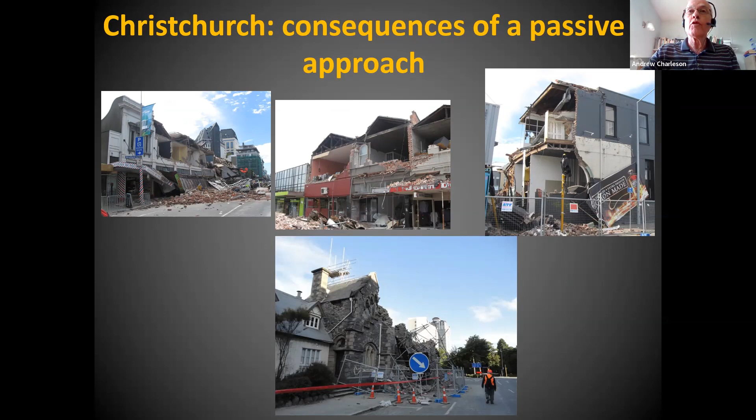Most of the masonry buildings experienced partial collapse, so unfortunately Christchurch has lost a lot of its historic buildings. Here is an example of an old 3-story masonry building in Christchurch, and you can see that most of the damage to this building has occurred by the walls and the gables failing in what we call face load.

If I can just explain using this, imagine this little pad is a wall, then the face loads are acting at right angles to the length of the wall. So these are the inertia forces we call face loads. And where walls are not tied into the floors or the roof diaphragms, where the tie along these lines is poor, then in the earthquake shaking, the masonry is incredibly vulnerable to falling out of plane.

So this is a good example, and there would be hundreds of masonry buildings where especially the upper walls just collapsed and fell onto the street. The lower walls are less vulnerable because they experience the compression of the masonry above them, and that compression gives a considerable degree of extra strength to these walls against out of plane loads.

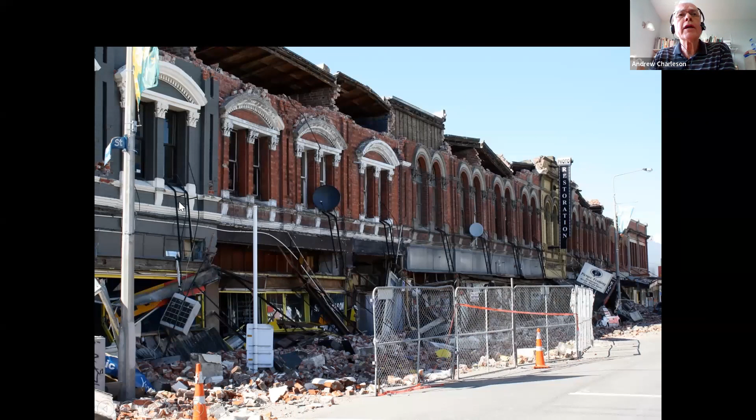Here you can see a street of old masonry buildings, and look, almost every one of the top floors of these buildings has lost its external wall. That was the pattern right throughout the city. So I think we could say the most extensive failure was for out of plane forces causing collapse of walls, but there was other damage as well.

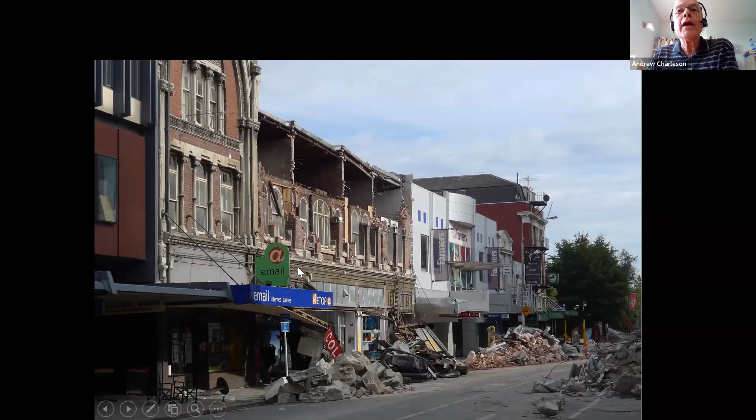Here's another street, and wherever the walls were not tied well to the floors and the roofs, there we experienced this face load collapse. The rest of the building, in this case, is relatively undamaged.

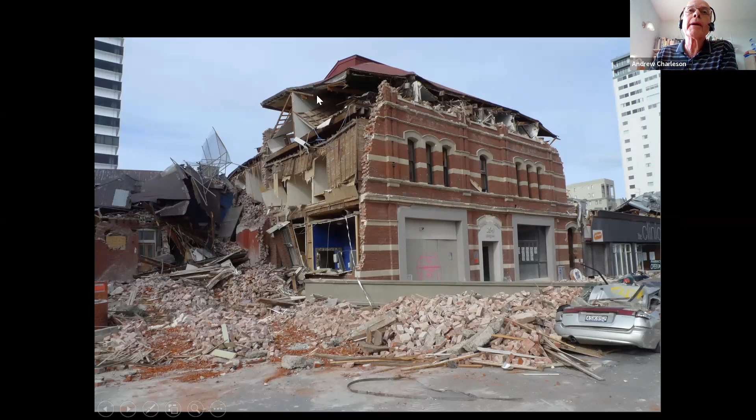Here is quite a severe case of the upper walls being lost. There might have been some load-bearing timber framing within the building, and so that's prevented total collapse. But you can see how the thick facade has fallen away from the main structure, and it's left this failure line going right down to the foundation here.

You can also see that the loss of the facade wall, excuse me, I'll just annotate with my mouse. You can see that the loss of the facade wall hasn't affected the load bearing of the floors. And that's because the floor structure is spanning parallel to the facade. So at least the building didn't totally collapse because of the direction of the floor spanning inside the building.

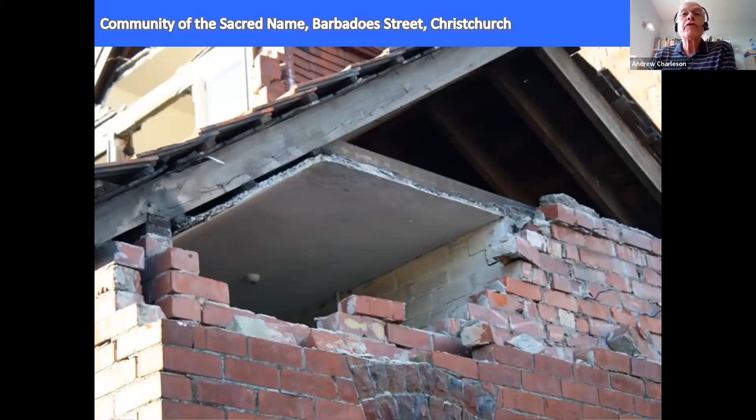As I mentioned, it was very common for gables to collapse. Here is a close-up example where most of the bricks of this gable have fallen. What we can observe is that there was no strong connection between the masonry and the timber roof framing, so effectively these bricks were just cantilevering under face loads.

We can tell that the masonry is not in good condition at all. Some of these bricks are really loose, and you can see that some mortar has been lost. The mortar wasn't very good quality, and so under even small face loads, gable walls such as these can almost be expected to fail.

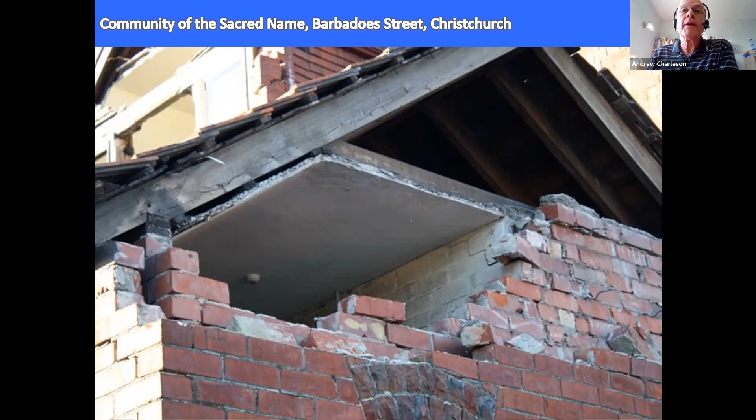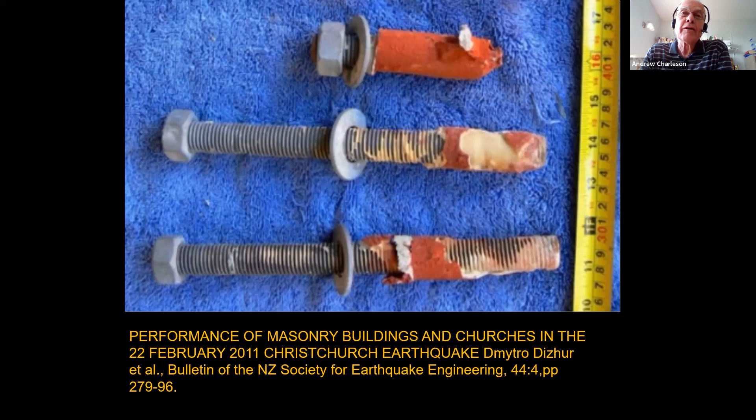These bolts had been installed as part of a retrofitting program, maybe a few years before the earthquake. This is just a reminder that when we retrofit, we've got to make sure the quality of construction is very high. Otherwise the earthquake will discover these points of weakness, and we will end up with performance perhaps almost as bad as if we had not retrofitted that building.

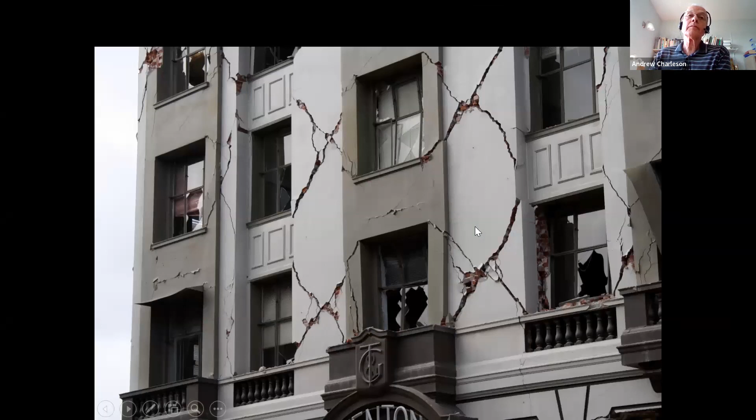Most of my slides so far have shown examples of face load collapse, but there were also many examples of buildings failing in shear. This is in-plane failure, and these diagonal cracks in the piers of this building speak very clearly of in-plane shear failure. This building at each level has suffered very badly from the overall inertia forces being resisted by this front facade, and the level of those forces was high enough to cause shear failure in the masonry within these columns or piers.

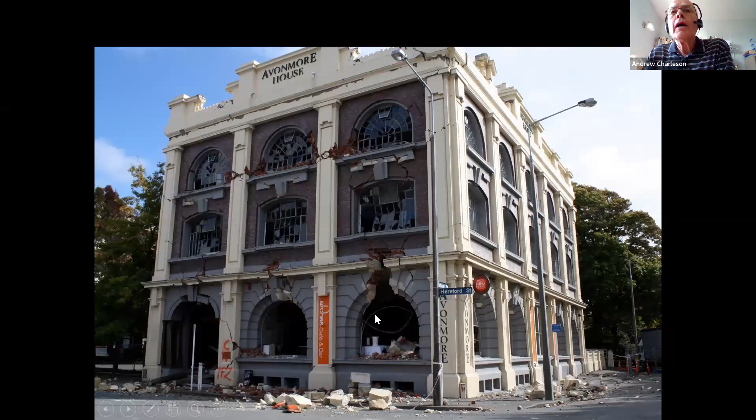Here is another building with large openings at each level. In this case, although we got a little cracking in the piers, not a lot, we mainly got failure in the spandrel beams, which are masonry. Due to the distortion of the building we get high shear forces in the spandrels, and where they are weakest, in this case at mid-span, failure occurs at every spandrel. This pattern continued up the building too, with the highest spandrel panels also totally failing. At the top of the building, it looks as if we got a bending failure at the base of these upper piers. So we get shear failure in the spandrels and some bending failure of the piers.

This type of damage was relatively common where we had buildings with many openings—you might say where the designers had basically created a frame building using unreinforced masonry. We know now that this doesn't work. Masonry is far too weak a material to be used as a moment frame.

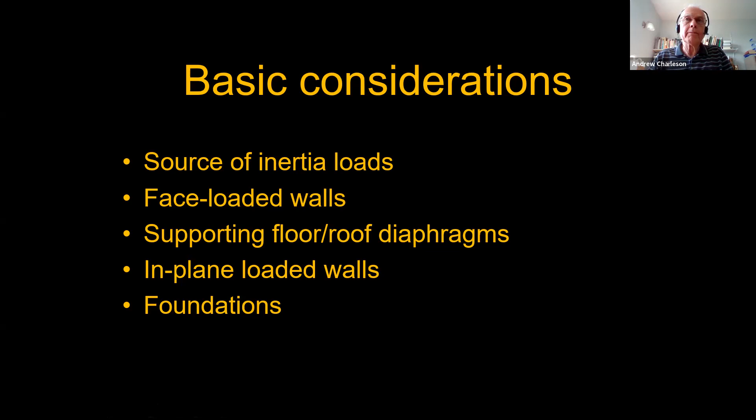So we're going to look at a little simple masonry building, which actually would have been quite typical of those shop buildings in Christchurch. The common scenario is to have shops at ground level, and then perhaps professional offices or even accommodation at the higher levels.

There are lots of these types of buildings in my own city of Wellington, although most of them now have been retrofitted. But we're going to look at this unreinforced masonry building and just look at some of the principles of retrofit.

So just as an overview, we can see that we've got very much an open facade at the street front, and that immediately would cause us to be concerned. That means that at least for the front of the building, for earthquake shaking parallel to the street, there's a chance of very severe damage to the masonry at this end of the building.

And then in the direction at right angles to the street, we can see actually we've got three really solid and long walls. So it's going to be very unlikely that this building is going to get severely damaged in this direction, because these walls are so long and probably quite strong.

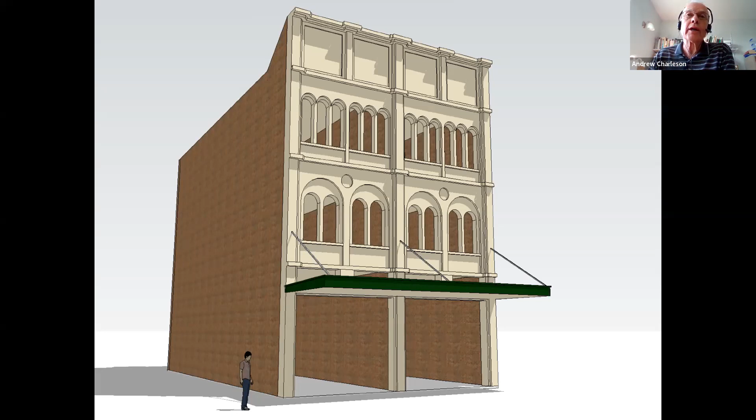So we can now look at one of those long walls in elevation. We can see that they extend pretty much to the whole height of the building. And then at each of the floor levels, we can see where we have the potential to create a floor diaphragm.

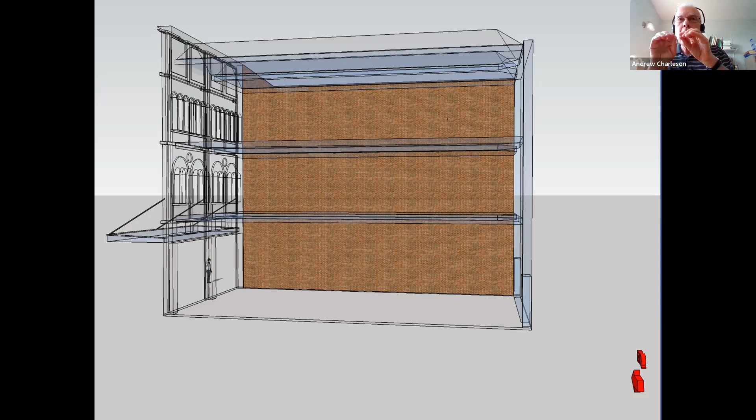Now, a floor diaphragm is a floor slab or a floor structure that in day-to-day usage resists the gravity forces on the flooring and the weight of the flooring itself. But during an earthquake, that floor system suddenly becomes a diaphragm because it has to resist the face loads from the walls and then transfer those face loads into structure, usually at each end of the building.

So if we are retrofitting this building, we've got to apply some form of structure to make the floor slabs function as a diaphragm so they can transfer the forces to the masonry wall at the right, and also to probably a new steel structural frame at the front facade of the building.

And so these diaphragms will have to be strongly connected to the brick wall to resist the face loads, and then the diaphragms will act as horizontal beams, transferring the loads into this wall and to this new steel frame at the front of the building.

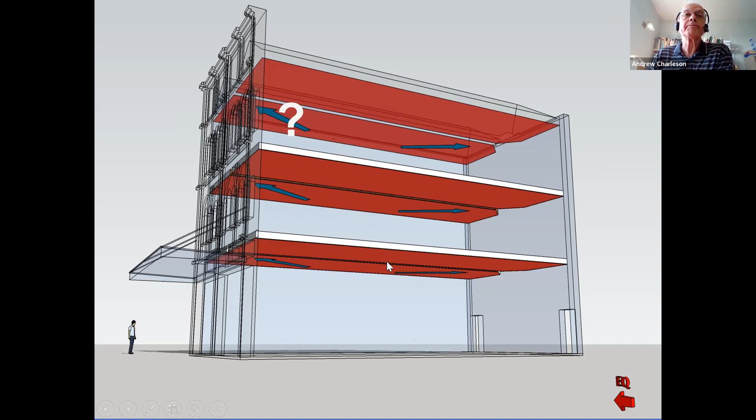Once the diaphragm forces get into the back wall of the building, they will be transmitted into the masonry through steel members bolted into the brickwork at each level. Then those horizontal shear forces will then start to go down the masonry wall through the formation of diagonal compression struts in the masonry.

So at the roof level, there will be horizontal forces from the diaphragm. They will cause these diagonal compression forces moving down towards the foundation. At this level here, we need a horizontal steel tie to drag these forces back horizontally to this side of the wall, and then the forces can continue their journey down to the foundation.

At the first floor level, we will also need a steel tie to drag the forces back, and then finally they can form these compression struts and go down into the safety of the foundation.

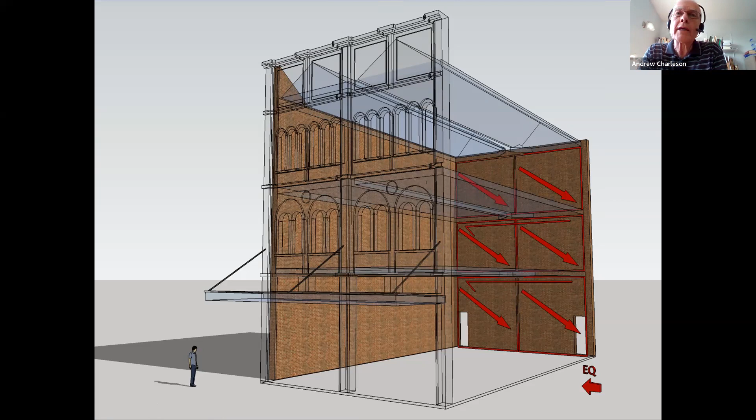Looking a bit more closely at the connection between the masonry and the floor diaphragm, we're looking at any length of masonry wall, it doesn't really matter which. This is the direction of earthquake shaking. In this particular case, during the retrofit process, we have screwed or nailed sheets of plywood to the underside of the floor system. In this case, we've got timber floors, so there'd be hundreds and hundreds of screws nailing the plywood sheets to the underside.

And then we will have strongly bolted, say, a steel angle section underneath the floor. This angle will be bolted at regular centers into the masonry, perhaps using epoxy grouted bolts. And then we would have bolts and screws from the steel angle into the plywood diaphragm. So the forces from the floor diaphragm are transferred through the plywood into the screws and nails that go into the plywood, transferring the forces into the steel angle. The steel angle then transfers the forces horizontally along to the end of the wall, and the bolts into the masonry transfer the forces into the masonry.

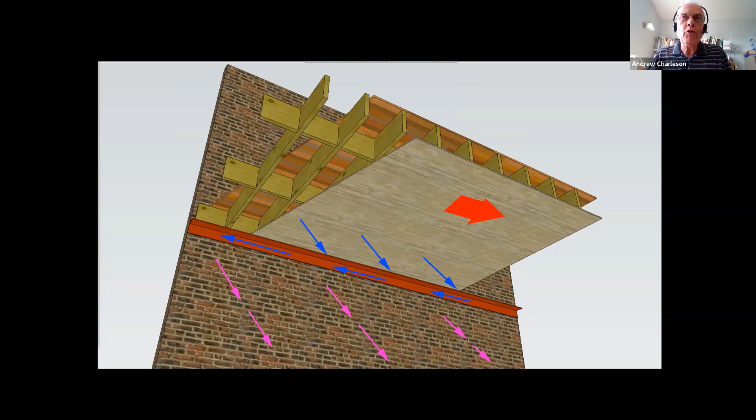So the floor diaphragm plays essential roles in both directions. In one direction, it's transferring inertia forces into this wall. For earthquake shaking in the other direction, the diaphragm is supporting this wall against face load. So these connections and the diaphragm are just so important as part of the force paths and the way they move in a retrofitted masonry building.

I mentioned that if we had diaphragms at the roof and each floor level, the normal scenario is for the diaphragm to transfer half the inertia load to the back of the building and half to the front. So now we can see these inertia forces, transferred by the floor diaphragm, acting in plane along the front facade.

And as I mentioned earlier on, there is no significant structure to resist these forces. These piers are just so thin and fragile, and it would be impossible for them to withstand any bending moments or shear forces of any magnitude.

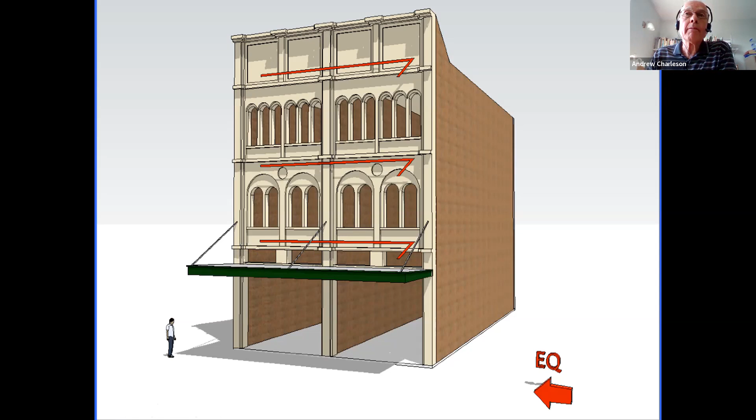And so in a building like this, it would almost be essential to put in a new steel moment frame, new steel columns going right up to the top of the building, and then at each floor level, new steel beams bolted or welded to create rigid connections at each junction between column and beam. I haven't shown you that new steel frame, but we'll come across it quite soon in the next few slides.

So there we are. That's just looking at the force paths and the primary considerations we've got to make as we approach the retrofitting of a masonry building. So let me talk about several different approaches to retrofitting.

And so the first approach I'd like to discuss is how we can improve the seismic performance of what we already have in the building. So, if possible, we try and work with the existing strength of the building. And in the first instance, we try and see if we can improve what we've already got, before we come in with more disturbing structural interventions.

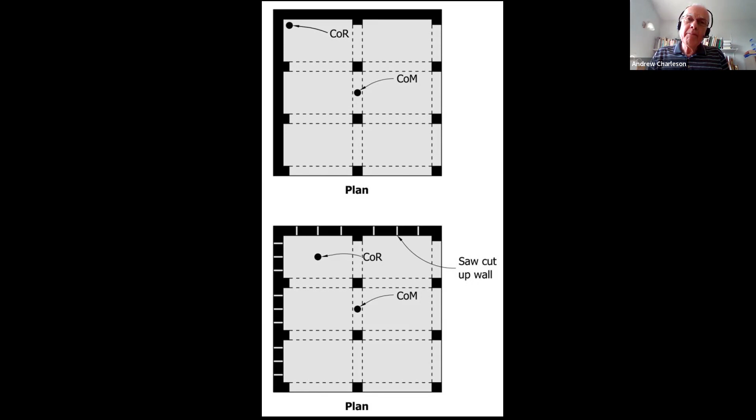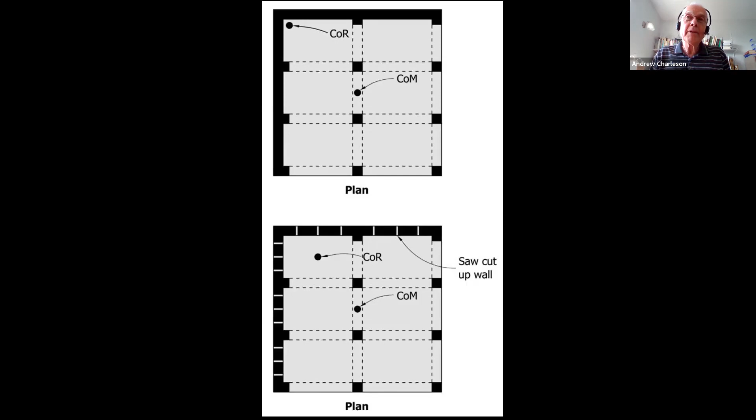As engineers and architects, we need to work together to identify the strengths of an existing building and see if we can use those strengths. Occasionally we have to weaken those strengths, and by doing so, we might get a far better earthquake performance out of the building.

Another example of where we can make use of existing strength is in this building, which I showed you earlier. It's like a shop building, open along the front of the street, with long and usually strong unreinforced masonry walls. Now if the building is quite long in the Y direction, it may not be possible to strengthen the diaphragms enough to transfer the loads just to the back of the building and to the front.

In cases like this, we might put in a series of new moment frames, whose purpose is purely to provide earthquake resistance in the X direction. Rather than having one huge moment frame at the front of the building and making the diaphragm very strong, I'm suggesting putting in 4 or 5 smaller moment frames, pretty much equally spaced along the length of the plan.

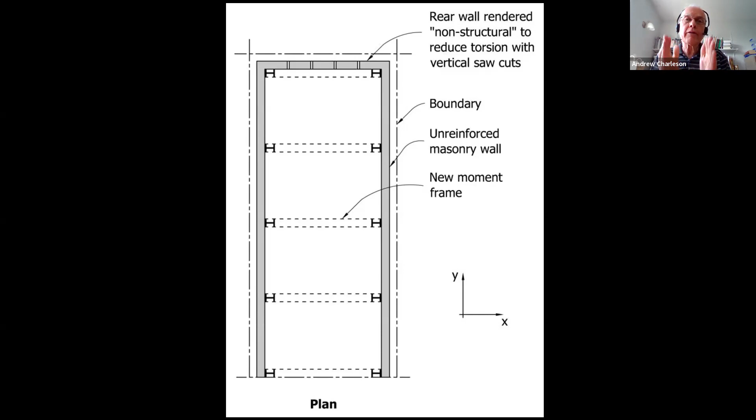So here's an example where we are putting in new structure, but only in one direction, basically, and using the existing strength of the masonry walls in the other direction.

Quite often, though, we find that the masonry quality is so poor, or that the length of the masonry walls is so short, that we've got no option but to put in new structural systems. So it's relatively common that we might create new reinforced concrete shear walls. We might cast these walls between existing columns, and we would need the reinforcement steel in the walls to be continuous up the height of the building. And we would also need horizontal bars, grouted into existing masonry piers or poorly reinforced columns that are existing. So it's quite common for us to create new shear walls that will resist the earthquake forces in one or both directions of a building.

Steel braced frames are also very common, at least in New Zealand and in other countries like the United States, especially on the West Coast. So it's very common to have steel cross brace frames that are designed to support the entire earthquake forces of the building, and therefore provide a building that is going to perform relatively well.

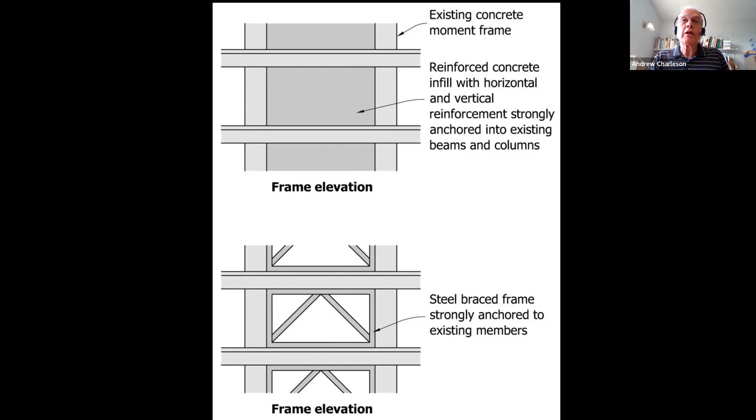Another approach we will often try and take in a building is to reduce its weight. I find it quite funny really, because the medical profession, probably internationally, is always reminding us adults that it's not good for our health to carry too much weight. And we're being encouraged to reduce our weight.

Well, exactly the same principle when it comes to unreinforced masonry buildings. The more we can reduce the weight of a building when we are retrofitting it, the less structural intervention is required. And so the most obvious place to reduce weight is to remove any masonry partition walls in a building. If you've got masonry partition walls, then it's really a great idea to remove them and replace them with light timber or steel framing with plasterboard linings. And thereby we greatly reduce the weight of the building, and it just makes it a lot easier and also cheaper to provide new resistant structure.

Then just a brief note on how to avoid pounding. Usually when we look at a street of masonry buildings, we discover that there is no separation gap between each individual building. The buildings are usually built against each other, and sometimes they will share a load-bearing wall or a boundary wall between them.

And so occasionally, in cases like this, it's possible to tie the buildings together to prevent them pounding in an earthquake. So one option that we should at least consider is to tie the buildings together so they move as one entity.

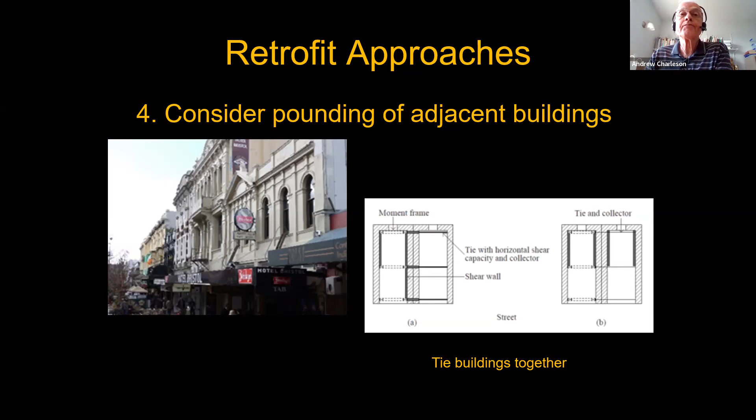So there are just a few brief principles about retrofitting. Now I'd just like to share some examples with you.

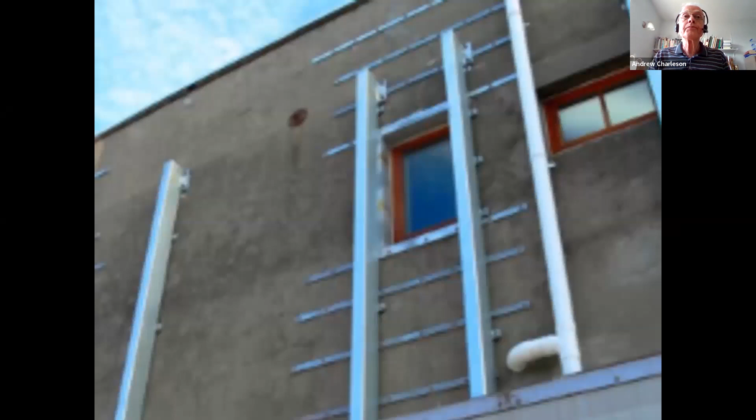First, an example of exterior structure added to a building just to stop the masonry wall failing in face load. In this case, the designers decided to put some vertical steel members on the outside of the building, probably because it was cheaper and easier, and they had access.

So this is like a vertical steel stud, or you could say a vertical steel post. But actually its real intention is to be like a vertical beam. It is strongly anchored into the roof diaphragm at this level here, and down below.

Then, at every 600 millimeters or every meter, there will be bolts bolted into the masonry so that under face load, the inertia forces from the weight of this masonry will be transferred through the bolts into the steel beam or post, and then the steel beam will bend and transfer the forces into this diaphragm here at this level, and then half of the forces will go into the diaphragm at the base of these steel members.

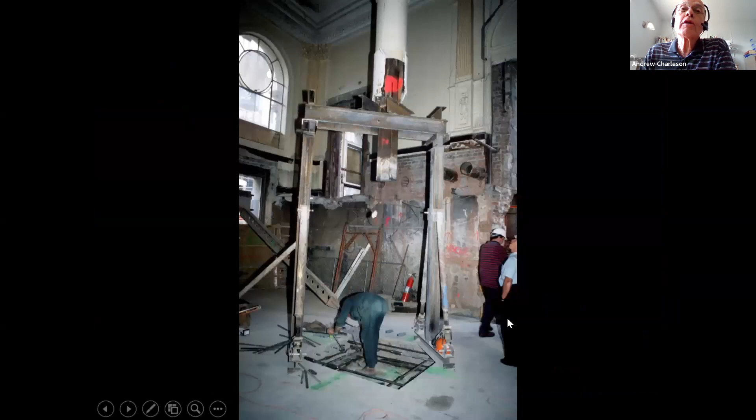The first step in the retrofit of this building was to put in some supports to support the weight of the masonry walls, and then to cut a slot right along the base of the building. First, some holes were drilled and circular steel beams were put in to support the weight of all the masonry walls and piers.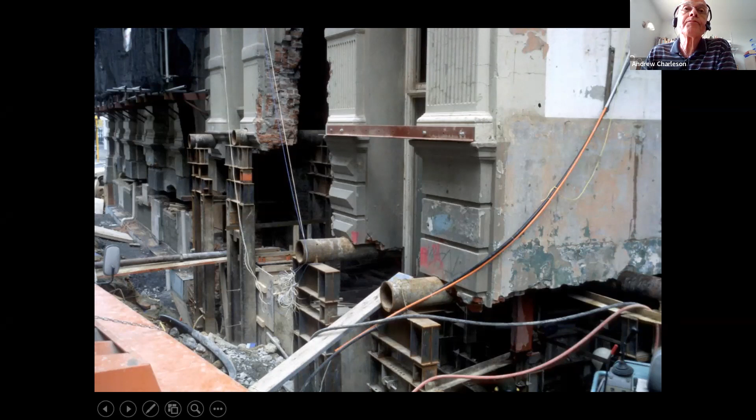A new reinforced concrete wall was built in the basement of the building. The existing cast iron or maybe even steel columns were cut, and they had their loads supported on temporary formwork, while new foundation pads were installed.

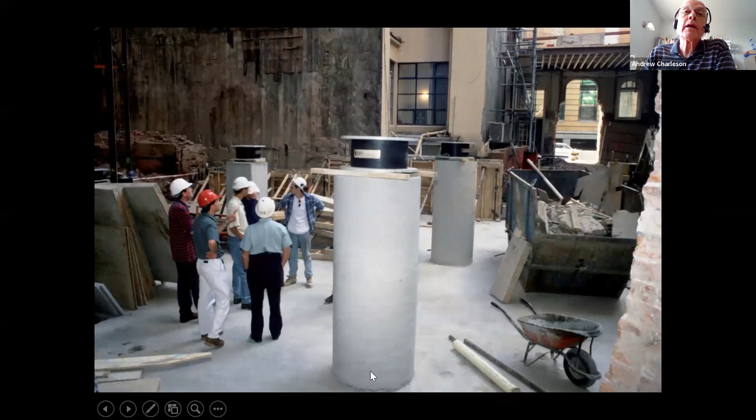Then in the basement, some new reinforced concrete columns were placed, and on top of each column was placed a lead rubber base isolated bearing. So the primary means of retrofitting this building was to base isolate it. A very complex and expensive process, but this method achieved the designers maintaining as much of the historic fabric of the building as possible.

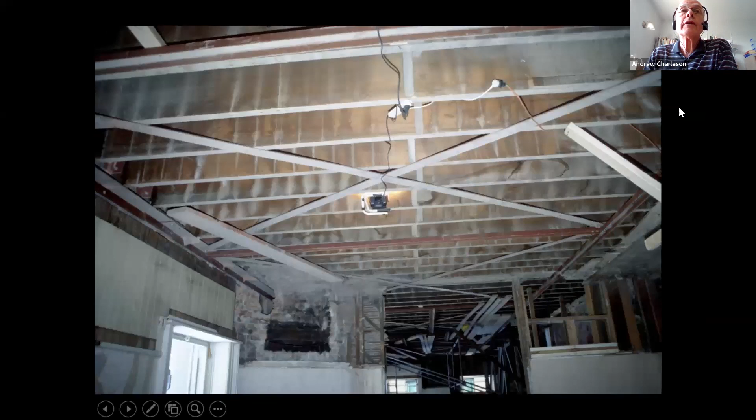The interior columns are all placed on these seismic isolators. These same isolators were put in the slots all around the existing perimeter as well. So there were tens of these bearings put around the perimeter and under each of the internal load-bearing columns.

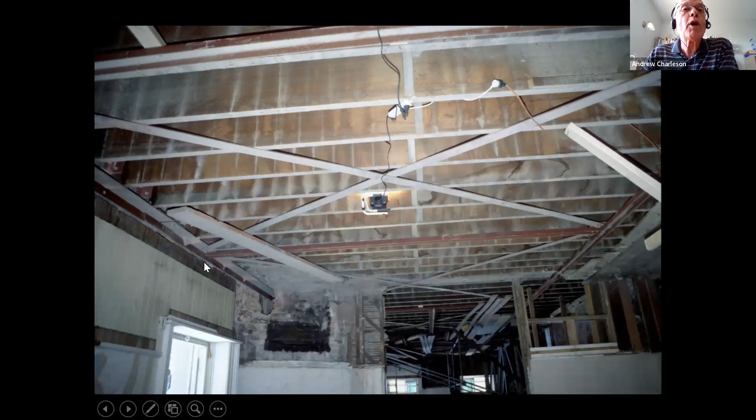Then it was necessary to upgrade the strength of the timber diaphragms, the timber floors. First, some new steel members were bolted internally along the length of the building.

On this particular floor, new steel strap bracing was fixed to these steel members and then attached to them. These steel straps form another horizontal truss at this floor level, enabling the inertial forces from the walls to be transferred to each end of the building.

There's going to be some new steel bracing put at this end of the building and the same at the other end. Because this building is seismically isolated, the inertia forces it will experience will be far less than for a non-isolated building.

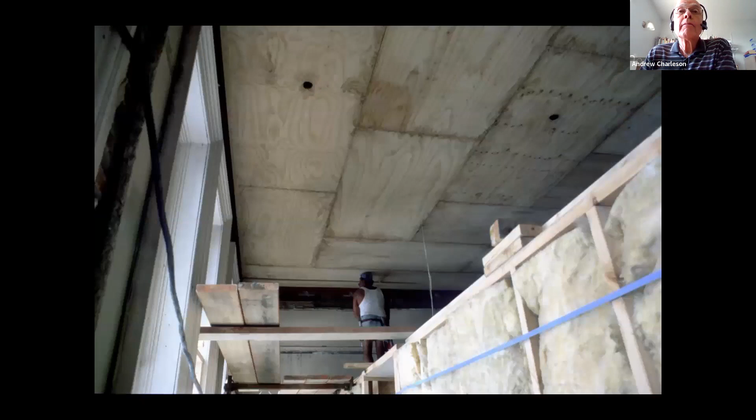At roof level, another diaphragm is constructed. This time, the designers chose to use plywood to upgrade the ceiling diaphragm. Here you can see the sheets of plywood set out in a staggered pattern. Although we can't see it, there would be thousands and thousands of nails running around the perimeter of each of these sheets, to create a really strong diaphragm.

This diaphragm will connect to new steel members running along the length and across above the new structure in the transverse direction.

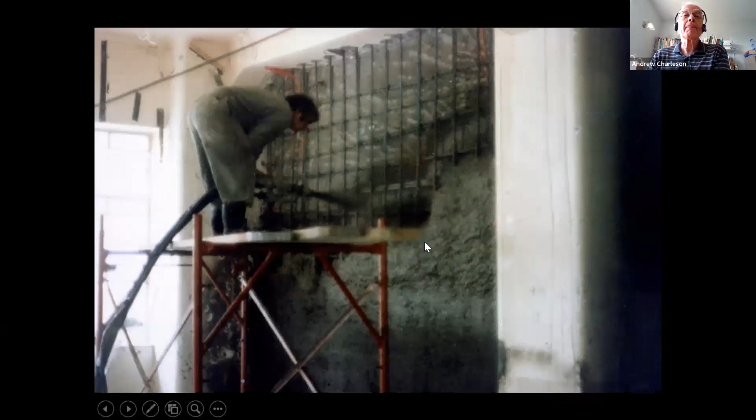I mentioned early in the presentation about using reinforced concrete shear walls as a means of retrofitting. Well, here's an example of using reinforced concrete, but actually spraying the concrete in. This technique is called shotcrete.

We begin by placing the reinforcing bars for the shear wall into position and bolting them into the existing masonry behind them. We've got to remove the plaster off the existing masonry so the concrete will bond really strongly with the brickwork.

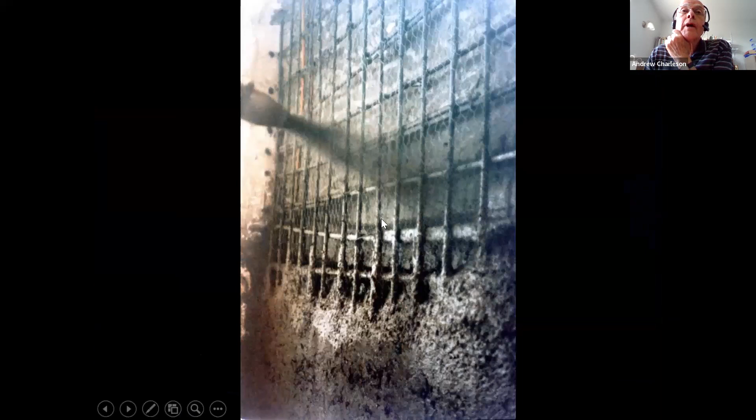And then we have a very special concrete mix that is propelled with compressed air and sprayed against the existing wall.

We usually provide some wire netting on the front face just to prevent the wet concrete from falling off the wall during the spraying process. So it's quite a tricky process, but the people who do this work become quite experienced, and we can end up with a very effective way of achieving new reinforced concrete shear walls.

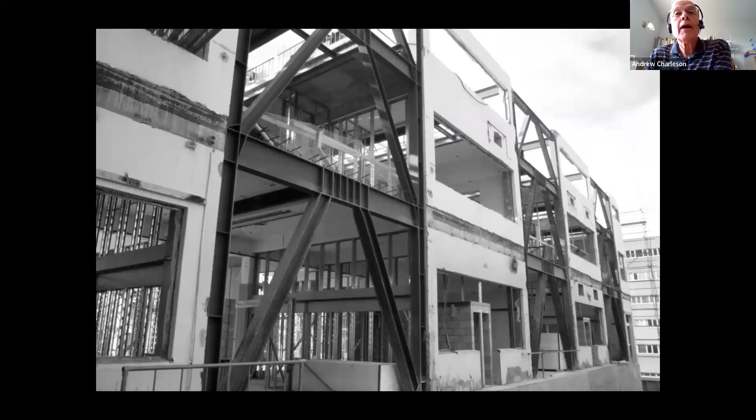Here is an old masonry and unreinforced concrete building, which was lacking seismic resistance in both directions. In this longitudinal direction, some of the existing fabric of the building was demolished and new eccentrically braced steel frames are inserted. In this image, you can see 3 bays with new steel framing.

This framing goes up the 3 stories of the building. I think they might have even built some extra new stories on top of the building at the same time to maximize the financial benefit. So now in the longitudinal direction, the earthquake forces are resisted by these really strong and ductile eccentrically braced steel frames.

This is the area where we have the eccentricity between the brace members, and this is what we call a structural fuse. In a large earthquake, this region will be very severely distorted. It'll absorb a large amount of earthquake energy and essentially protect the rest of the steel members from failure.

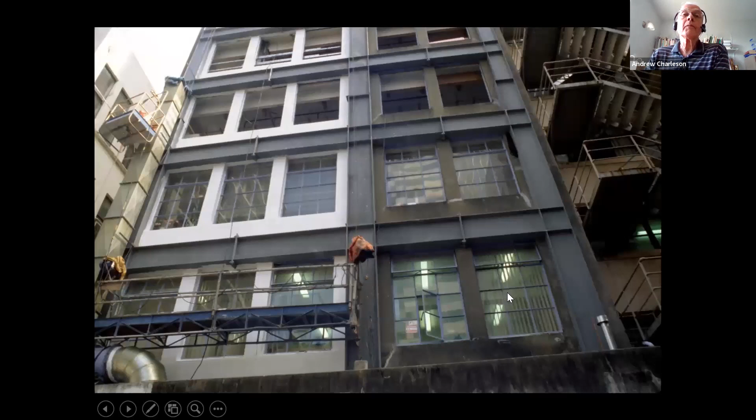Here's another example of new steel structure being applied to an old building of concrete and masonry. On the back of this building, where there was access, you can see how the designers have built and attached a whole new steel moment frame. And so here is a rigid joint.

Here is the bolted connection where they did an on-site connection, connecting this part of the frame to this part. And I think here is probably where they joined the columns at mid-height. Once again, this might have been a welded connection.

And in all these steel members, although we can't see it very clearly, they need to be bolted with hundreds of bolts so that their forces from the existing building can be transferred into this new structure down to the safety of the foundations.

At the front of the building, they built a similar frame inside the external facade. So they had to do quite a lot of local demolition to put the new steel frame inside the building and then bolt that to the existing structure.

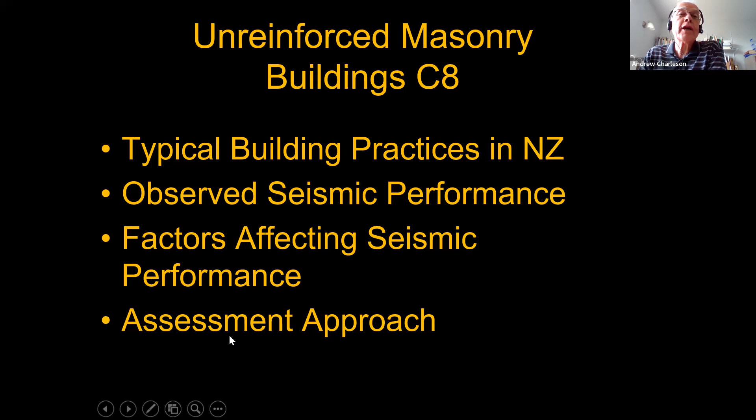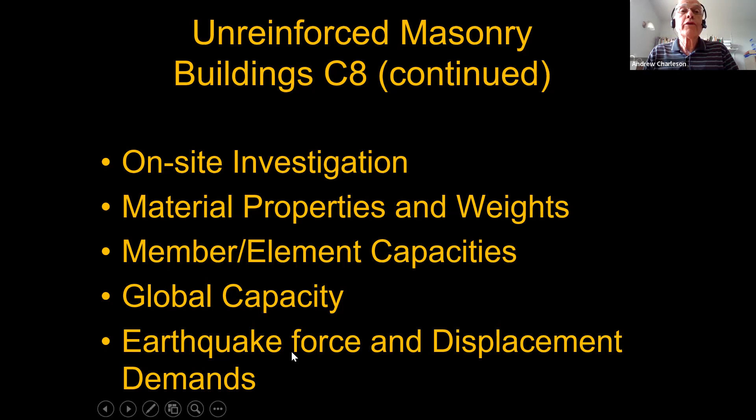It then talks about how we should assess the strength of these buildings, whether or not we need to do on-site investigations, whether we have to do some demolition to establish the strength of the brick and mortar. Information about the weight of materials and the likely strengths of members, the overall strength of the building, and how it might deal with the earthquake forces and displacements that occur during an earthquake.

And then it suggests different methods of retrofitting. I'm just going to give you a taste of the material, because take unreinforced masonry chimneys - they are the most vulnerable of all the elements of an unreinforced masonry building. Chimneys are usually the first elements to crack, topple, and fall.

So here are some techniques to retrofit them. We can do internal post-tensioning, we can put in some internal steel tubes, we can fill them with concrete and reinforcement, or we can put external steel strapping.

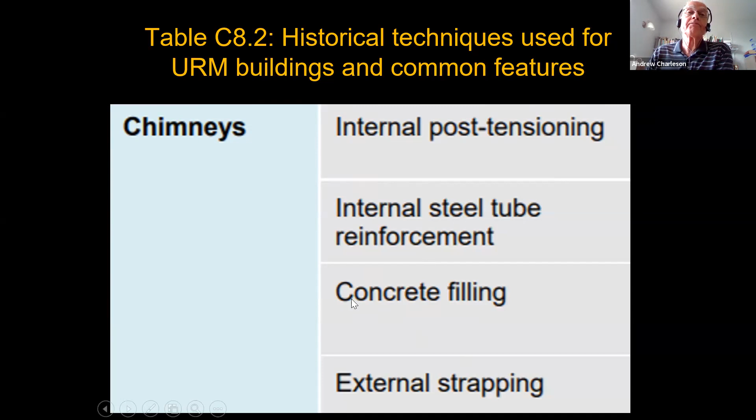What about walls? For face-loaded walls, we could put vertical timber or steel mullions, studs, or posts. We could put in horizontal members that span between, say, new moment frames or new shear walls. We could do internal post-tensioning of exterior masonry walls to improve their face load resistance.

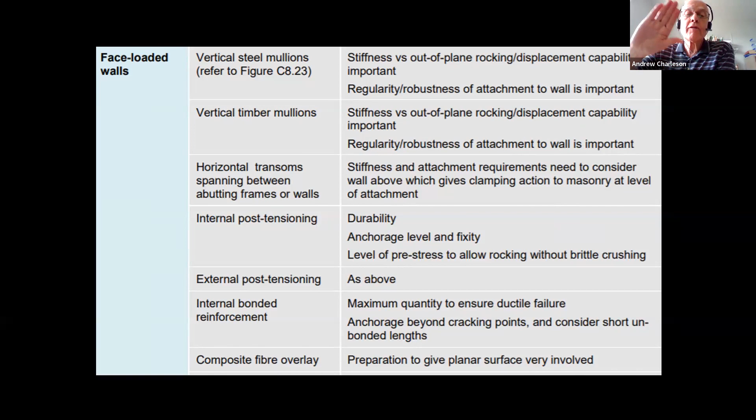We could do external post-tensioning. We could put in some internal bonded reinforcement, or we could put some composite fiber overlay, like plastering, especially on internal walls, with layers of reinforced plaster to give face load resistance to those walls.

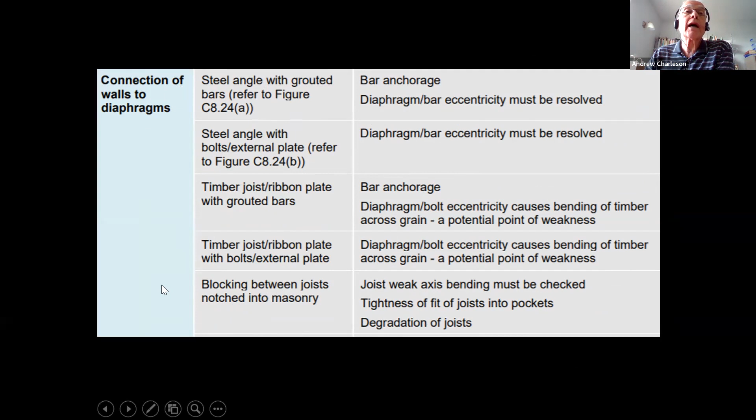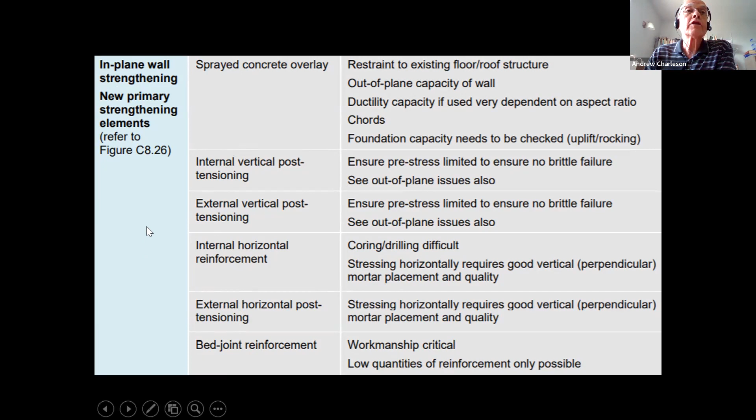When it comes to connection of the walls to the diaphragms, once again a number of different techniques are provided. And then when it comes to strengthening masonry walls for in-plane forces - in other words, to prevent those very serious diagonal shear cracks, and also to prevent the bending failure of masonry piers - here are a whole lot of other techniques that can be used by designers. So this is a real toolkit of options for you.

And then if you want to further investigate and look at a very accessible document, I'd recommend this tutorial written by Jitendra Bothara and your own Svetlana, a tutorial on improving the seismic performance of stone masonry buildings. So if you're working more in stone masonry rather than, say, brick construction, it would be worth having a look at this publication, which is also a free download from the World Housing Encyclopedia.

And in your notes, you can just work out how to get hold of that document.

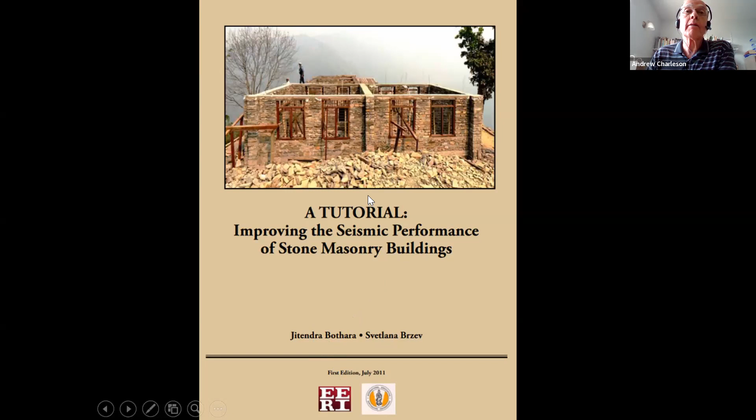So just to conclude my presentation, a couple of thoughts primarily aimed at the architects among you. And that is that retrofitting should, hopefully, always respect the existing architecture.

What we so often find in seismic zones is retrofitting does not respect the architecture. It is just placed there, probably designed by engineers without any involvement of architects. And the engineers are doing the cheapest job possible, which could look horrible.

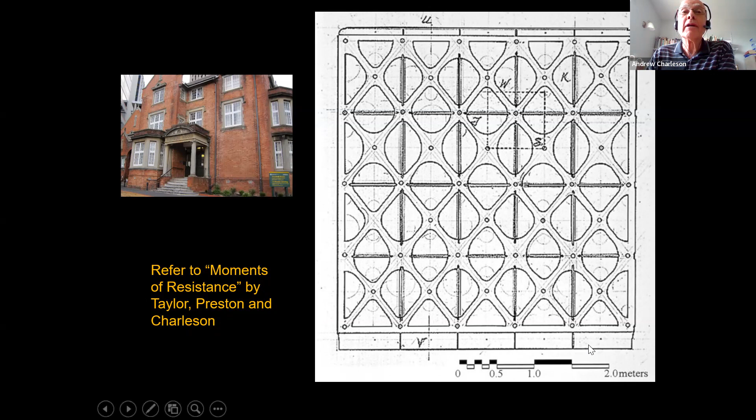This was an attempt to not only avoid destroying the existing architecture, but actually to try and add another layer of richness to the existing architecture. This was just one of the schemes that we came up with in this little research project we did.

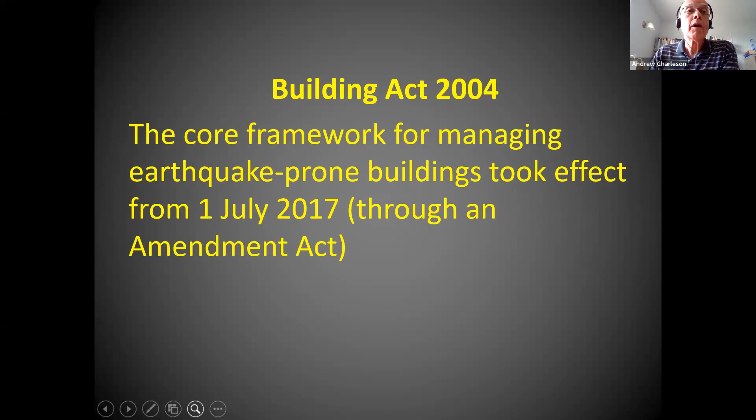Thank you very much, Andrew. I believe that I cannot see Rade on the call. Maybe again he has problems with the internet, so I could coordinate the questions if there are questions for sure. Thank you very much, it was a very interesting presentation.